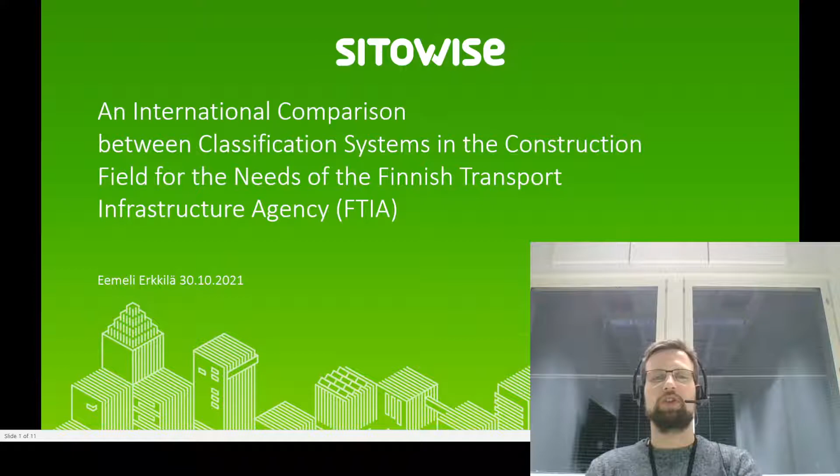Hello, this is a presentation of a master's thesis, an international comparison between classification systems in the construction field for the needs of the Finnish Transport Infrastructure Agency. My name is Eemeli Erkkilä. This thesis was done in Aalto University through my workplace Sitowise to the Finnish Transport Infrastructure Agency.

This thesis has two parts. The first one is a literature review, where first I have figured out the current situation with classification systems in the Finnish construction field, mostly the infrastructure field. Then what standards are related to classifications. And then I have compared the classifications used by transport infrastructure agencies and some similar organizations in different countries.

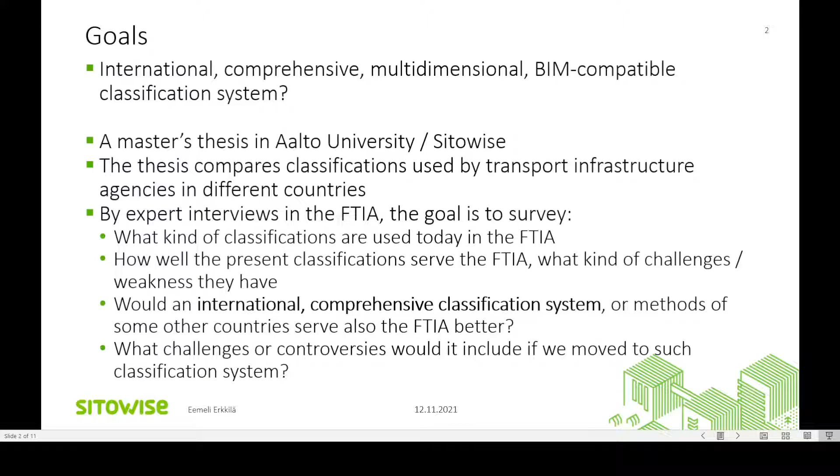The second part is an interview study where I have interviewed experts in the FTIA about what kind of classifications are used there today, how well do the classifications serve their needs, what kind of challenges or weaknesses do they have, would an international comprehensive multidimensional BIM compatible classification system serve their needs better, because the current systems really aren't, or would methods of another country serve also our needs better, and what kind of challenges or controversies would it include if we move to such classification system.

The current situation in Finland is that in the infrastructure field, we have this Infra 2015 classification system, which includes 6 separate classification systems, but no system to mix them together. So although it's sometimes called multidimensional, it is really not, but it's a so-called orthogonal system. And then we have other systems more or less linked to that. When we go to the building construction field, we have totally different systems from the infrastructure field.

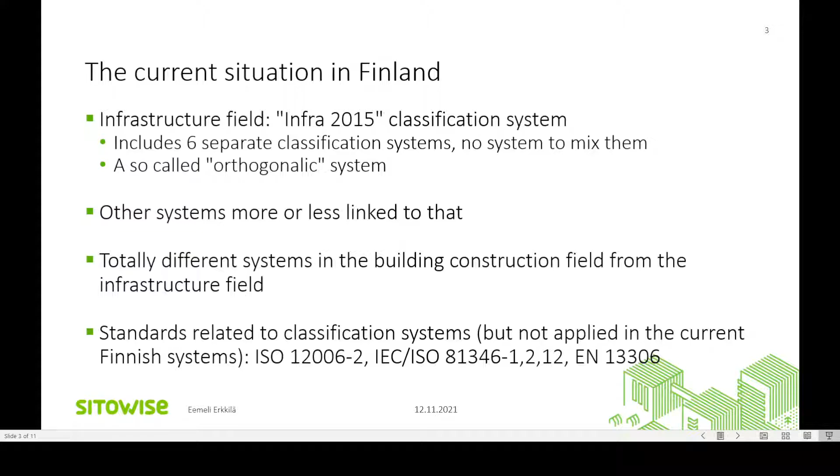Then the standards related to classification systems, which are not applied in the current Finnish systems, are here. The first one advises classification in the construction field on a very general level. The second one advises building reference designations for objects or assets. And the third one defines the maintenance terminology.

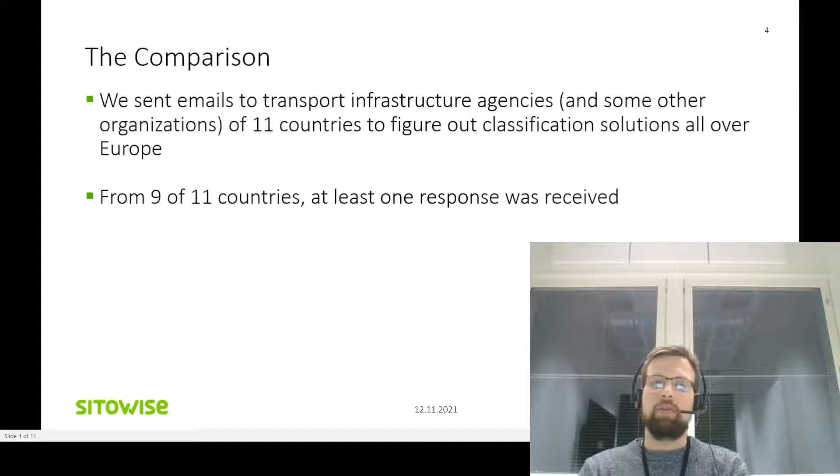Then the comparison. We sent emails, me and my guidance group, to people in transport infrastructure agencies or some other organizations in 11 European countries, and we asked what classification solutions or standards they have there. From 9 of 11 countries, at least one response was received.

The general results we got for the comparison were that the need for BIM compatibility in classification is widely recognized, as well as the need to extend classification and BIM to the maintenance phase. Currently, they are not normally applied in the maintenance phase, which is just dumb because functional asset management requires that the data is in good order. Situations in the countries vary, but no country seems to have a complete solution yet.

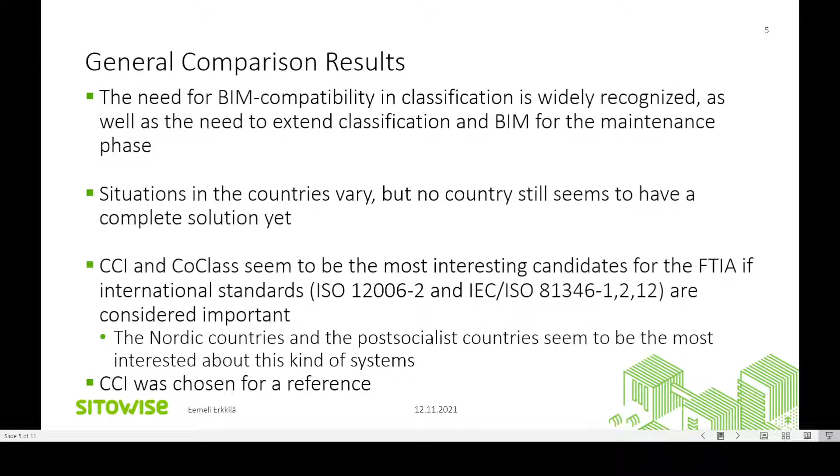For us, the most interesting reference systems were CCI and CoClass, which are based on the same standards. CCI is an international system and CoClass is a Swedish system, also tried by the Norwegians. An important fact was that the most interested countries in these kinds of systems were the Nordic countries as well as the post-socialist ones. Here I have the comparison results country by country, but in this presentation I'm not going deeper into them, but you can see them here.

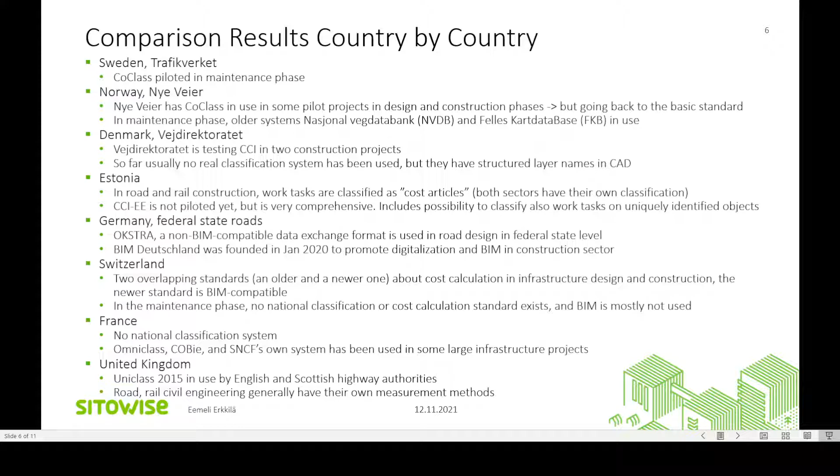Then the interviews. Originally, 7 interviews were planned and held, with 14 interviewees in total. All experts of the FTIA, except in the road design interview. There were also people from Elinkeino-, liikenne- ja ympäristökeskus, because their role in road design is quite strong. But this was the division: different transport modes and life cycle phases.

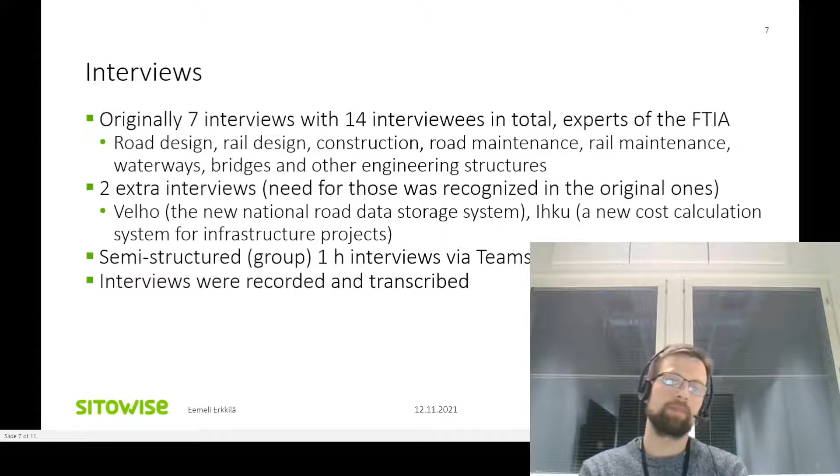Then in these original interviews rose the need for 2 extra interviews: Velho, the new national data storage system, and IHKU, a new cost calculation system for infrastructure projects, because these are quite closely related to classification systems and new projects. All the interviews were held by Teams because of the pandemic, 1 hour each, and they were semi-structured, intended as group interviews, but in some interviews I had only 1 interviewee. The interviews were recorded and transcribed.

Then the summary and conclusions about the current situation. Use of the Infra 2015 classification system is promoted in the FTIA, but the real level of usage varies a lot. And as one interviewee said,

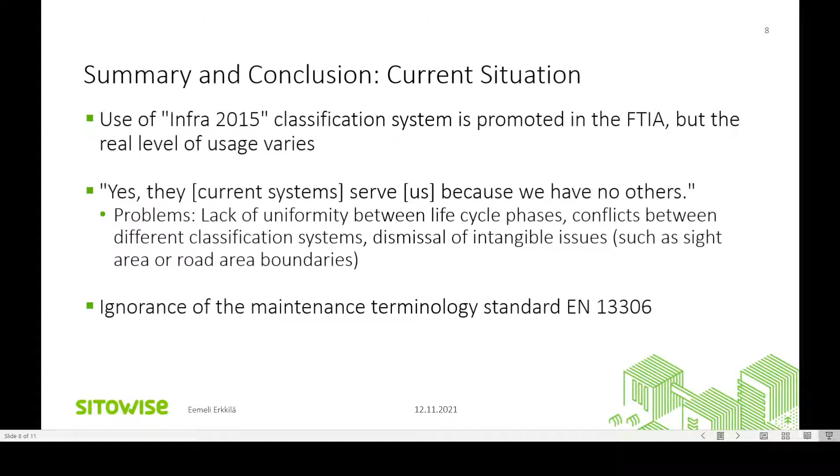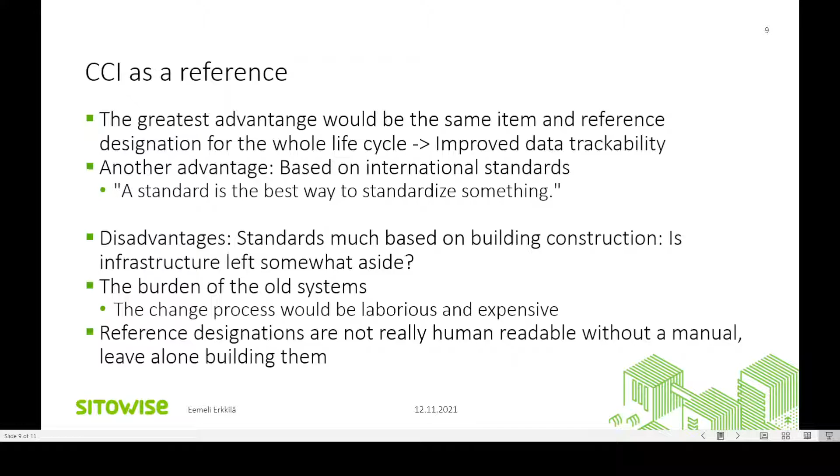Then the disadvantages: the standards are much based on building construction, so it is somewhat a threat that infrastructure could be left aside. And the old systems are a burden. It means that the change process would be laborious and expensive. CCI has a logical, standardized way to build reference designations for objects, but it is true that they are not really human readable without a manual, let alone building them.

And then the recommendations. Advantages would definitely be gained through CCI, but the change would be expensive and laborious, so a thorough cost-benefit analysis is necessary before making any changes. We should also keep our eyes open if some other options are coming in the future. An important thing is that experience of different forms of transport is needed. If a system works on roads, it doesn't mean it works on railways. Or if it works on railways, it doesn't mean it works on roads.

International uniformity in classification is good. No one is against it, but usually it was seen that our national needs come first. Uniformity through the whole construction field was not seen as very important in the FTIA. But anyhow, CCI or not, the current Finnish maintenance classification system should be totally renewed and based on the standard EN 13306.